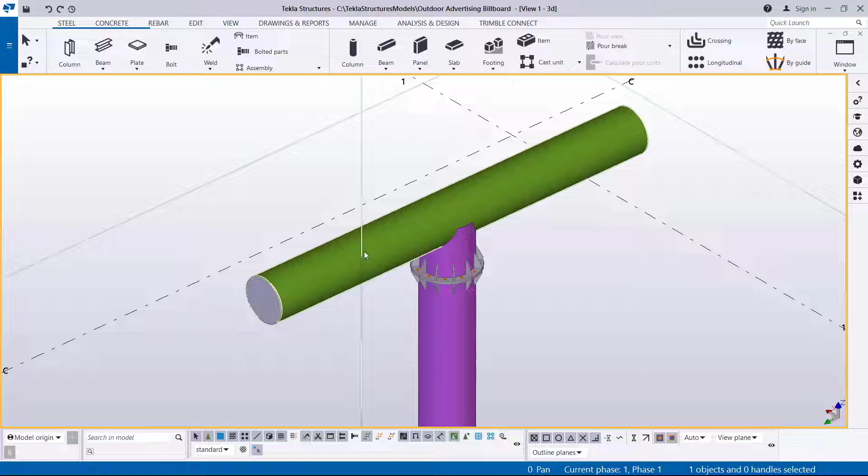Now, on top here, if I press Control R, I'll be able to snap on a particular location, defining my rotation point, and left click and hold my mouse and rotate. That will turn that around like that. So if I zoom closer, you'll be able to see this member.

My target will be to place points along this particular horizontal member. So if I click on it, you'll see this is the datums, and these are the locations that will help me place the points. Once this has been highlighted like that, I'm coming to edit and come to points.

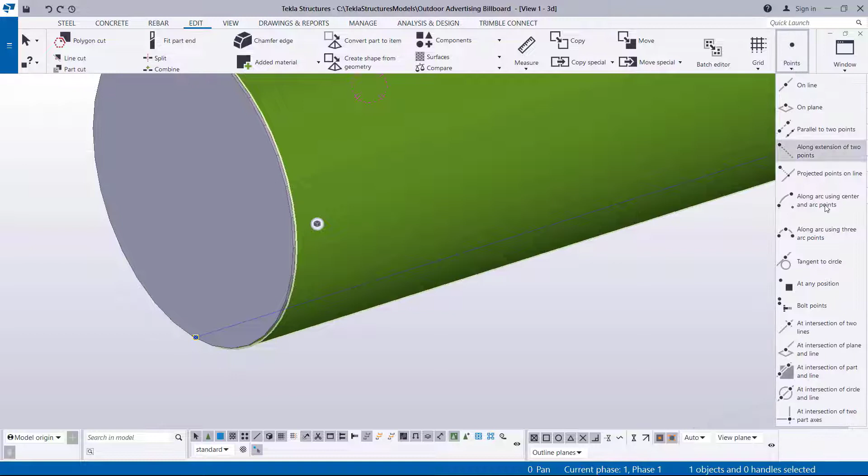I click on the drop down arrow there and pick on at any position. So I'll snap on that point right there and snap on the point right here. I'm going to use the 2 points here.

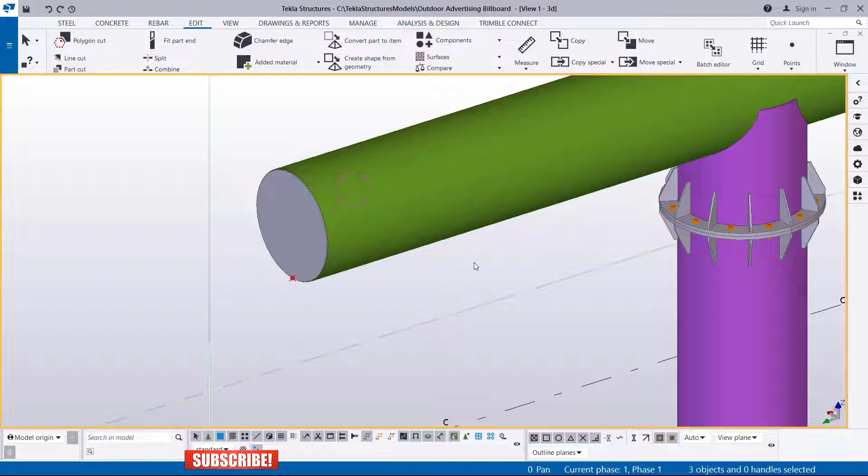I'm going to select that, press Control, and pick on this point I've just created. I want to copy it up. To copy it up, first you have to confirm the thickness or diameter of this particular member. So double click on this member and you'll see this is 650. That 650 is what we'll use to offset this, to copy these members, or to transfer these points up here.

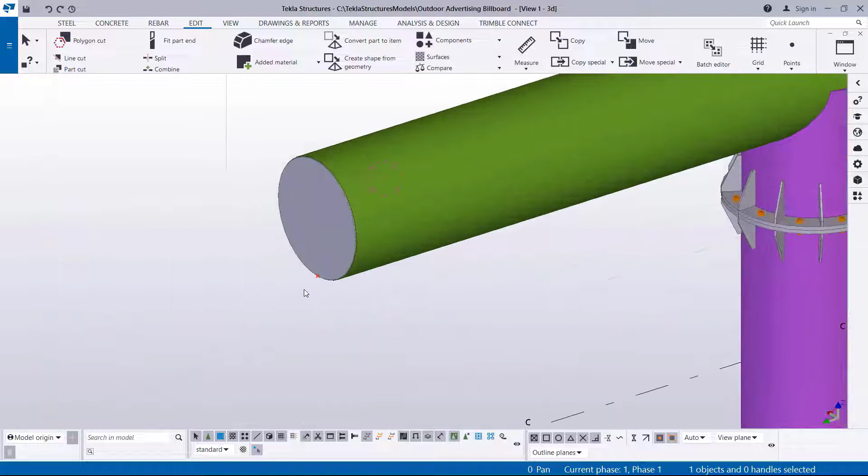I'll right click to come out of that command and start my selection afresh. I'll select on that point, and while pressing Control, select on that point. I'll right click and come to move special, click linear, and on the z-axis type 650 right there, then click move. So the points have moved up here.

This is the location where I wanted the points to be, because the key reason I'm using these 2 points is to guide me on the exact location where I'll be placing these steel members that will be holding the advertising frame that we'll be creating as we move step by step.

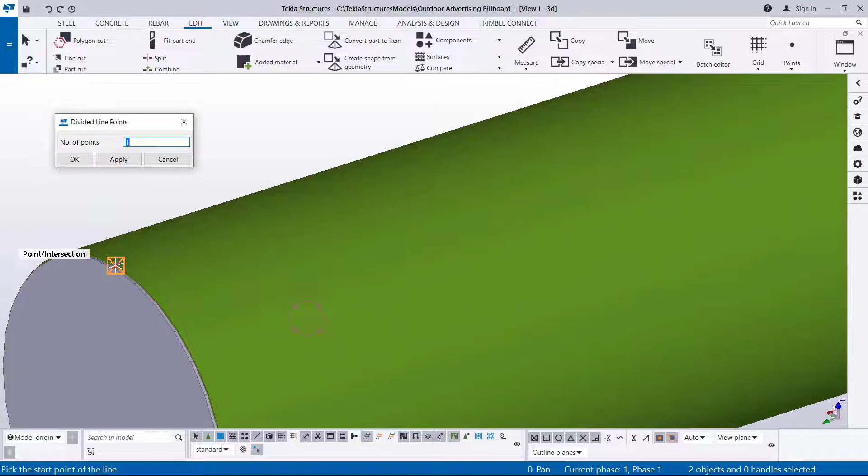I'm going to create the midpoint between these 2 points here. I'll come to edit, come to points, click on the drop down arrow, and pick the on line option. I'll snap on this particular point and move all the way to this far end and snap on that point. If I click that way, I'll be able to create a point in between the two.

Before creating another point, let's check the distance between these 2 points. Before even measuring, from here to here is 3, because the full length of this particular member is 6. So we want to create another point between this point and that point, and this is how we do it.

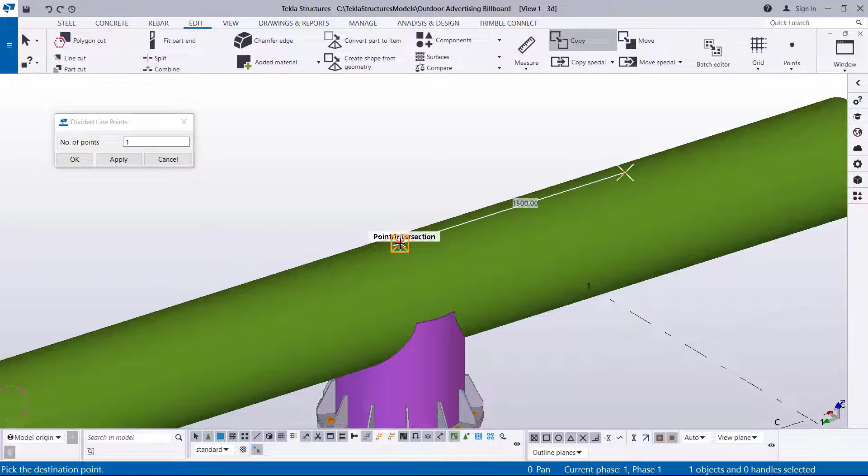We'll zoom close to that point right there and move to this particular point right here, and snap right there. So I've created a point here and a point here. I can transfer this point by selecting it, then right click, come to copy, hold that point from this point, and place it right there to have the 2 in place.

Let's check the distances. I come to measure, and I want to measure from there to here. That is 1500 millimeters. So that's exactly what we wanted to create.

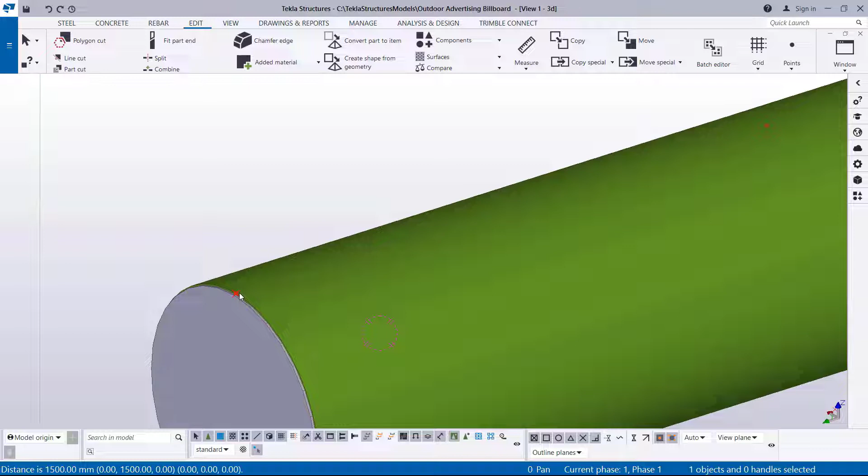Now another thing we want to do: this point is closer to the edge, and that will make it harder to create a member here. We want to give it an offset of 200. We'll eat slightly on this far end by 200, so what will remain will be 1300.

The same thing will apply there. We'll offset that inside by 200 and that side by 200. So let's go and do that. I'll select that point right there and click move, come to move special, and click linear.

On the y-axis, you can see the y-axis is pointing in the opposite direction from where we're moving to. So if you copy any member or point using the XYZ axis, the axis you are copying that component to is the only axis that should have the distance you intend to offset with. The rest should remain 0.

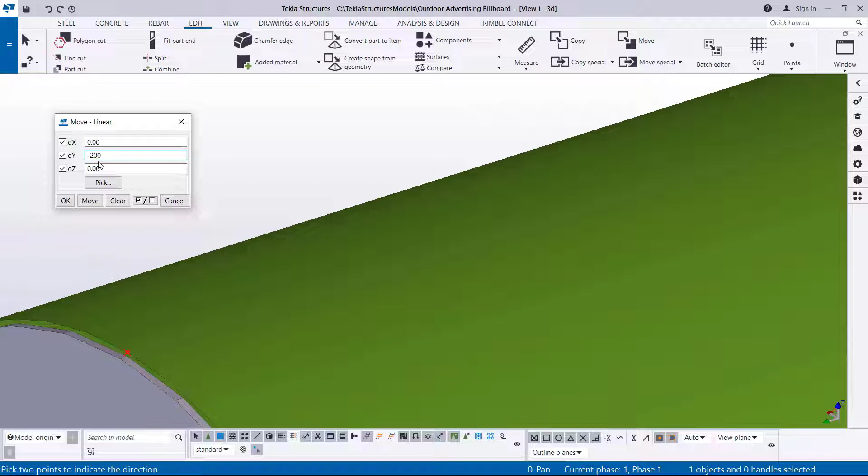So let me change to 0 and come to y-axis. I want to change that to 200 millimeter. Since we are moving in the opposite direction of the y-axis, as you can see here, we'll prefix this dimension with a negative sign. So I'll go ahead and click move. If I click move right there, I'll be able to see that it has moved inside.

So I'm going to do the same thing here. I'll select on that, then right click and come to right click once again. This is appearing because our command is still active, so I'll click interrupt once again, right click, interrupt again, right click again, and we can go ahead and select that point, right click and come to move.

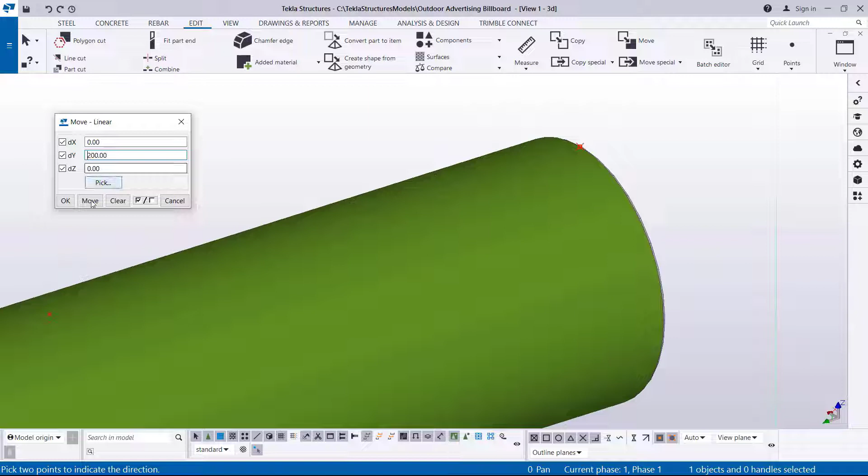And if I click move, since we are moving in the positive direction of the y-axis, I'll get rid of this prefix negative sign. So I'll remain positive, without a negative means positive. So I'll go ahead and click move. So I've shifted that point to that location by 200 millimeter.

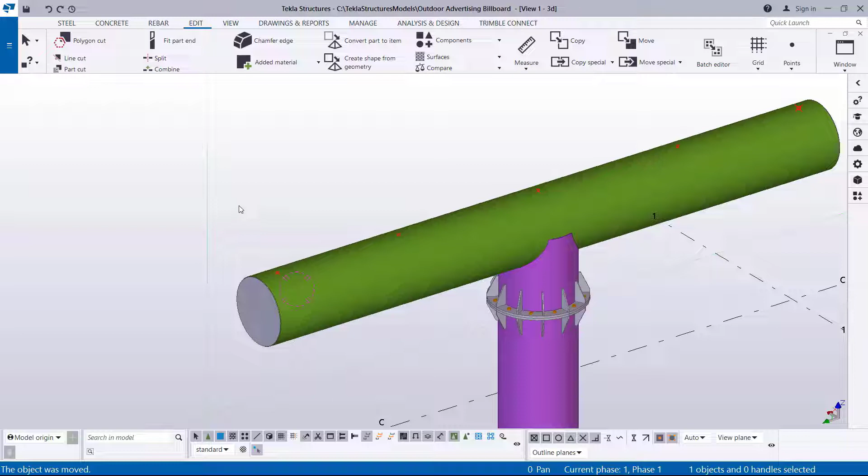So what I'm going to do, I want to create a member here, that way a member here that will be stretching, that will be hanging on the other side 750, and hanging this side by 750, a total length of 1500. So how do we do that?

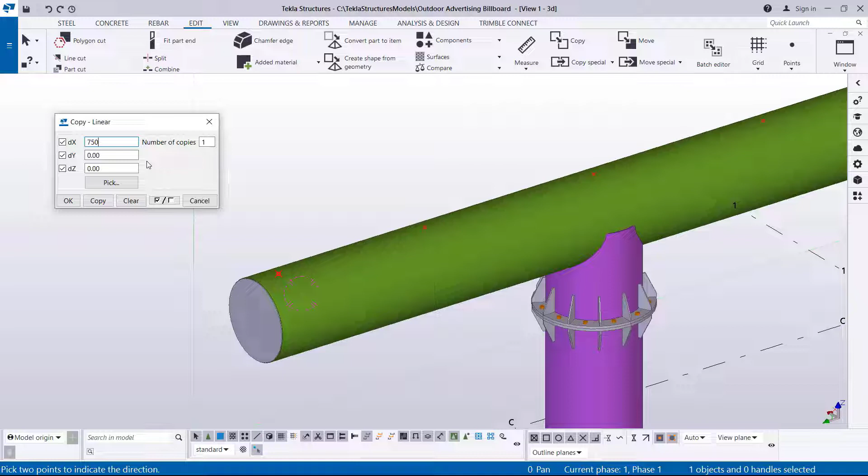I'll use this. Select on that, right click and come to - let me right click and interrupt. I'll select on that point, right click and come to copy special, and I'll pick on linear. So once I've picked on linear, I want to offset or create a point in the direction of the x-axis by 750. Let me just type 750 there because the full length of that steel member will be 1500. So I'll go ahead and click copy. So I've created that member there.

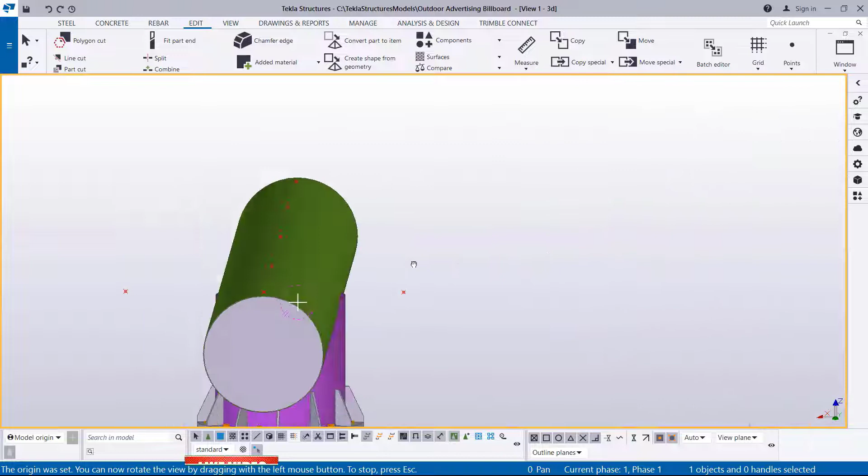So I'll copy this. I'll select from that point right there, right click and come to copy, and I'll hold it from that spot and copy it right there. So you can see, if I press Ctrl R and try to turn that around, you can see I have the 2 points in place.

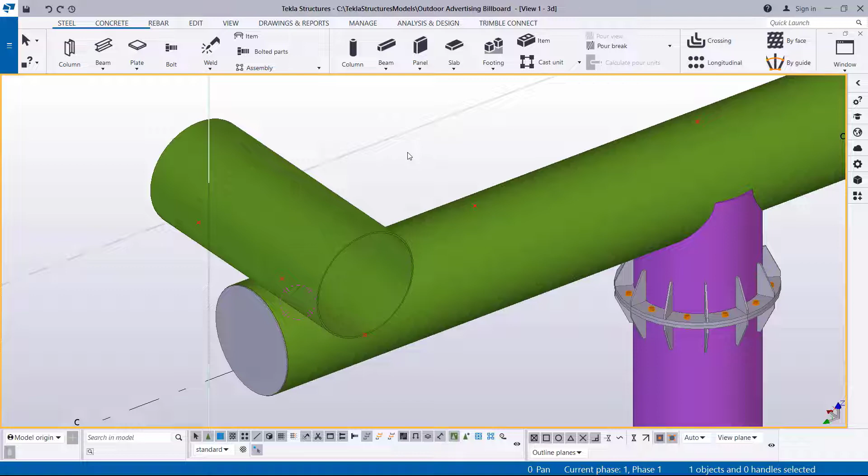So what I'm going to do, I'm going to create a member here. I'm going to come to steel, come to steel beam, and pick on the beam, and I'll snap on that spot and snap on this spot right here. So you can see a circular hollow section - it is appearing because that is our default member creation as it is now.

Now I'll double click on it and modify this, or customize this to a preferred steel size or steel member profile. So this one I'm going to use an I-beam. So I'll come here.

I'll come to steel profiles here, let me just scroll down. I'll come to steel sections here and click on that. So that is a steel Z and all that - I don't need that. I need I-profiles like there.

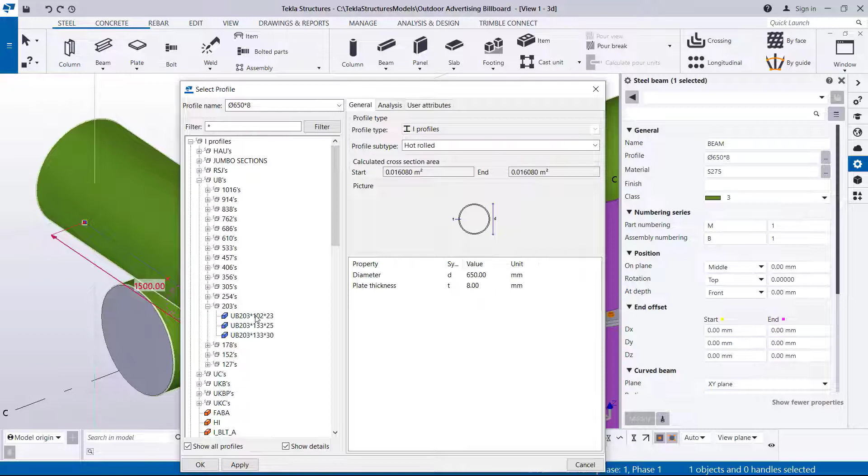So if I come to UBs here, I'll be able to come to 203s. Click on that, and I'll pick the first one, click apply, give it an OK, and give it an OK here. So I have that member in place. So if I press Ctrl R and pick my rotation point, if I turn that, you'll be able to see I have that member in place.

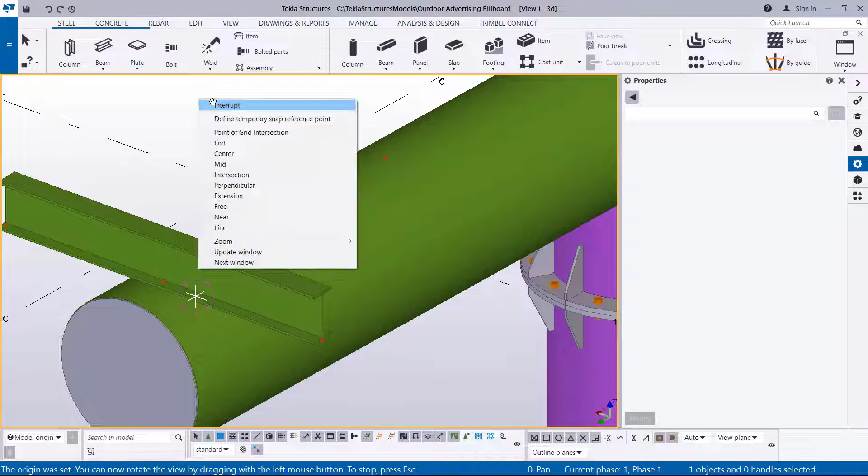So this member will not be sitting right on top of this circular hollow section. It will not be strong enough. So we are going to create another member here, and offset this by 100 upward.

I'll right click and come to special move here, pick on linear, and I'll move it up. Let me change that to 0. So on the z-axis, I'll just type 100 millimeter and offset it up by 100.

So I'll do the same thing with this point, because this will help me create a column there accurately. So if I create the point, now I can use either a column tool or a beam tool. So let me just create the point so that it will make it easy for me to create a member right there.

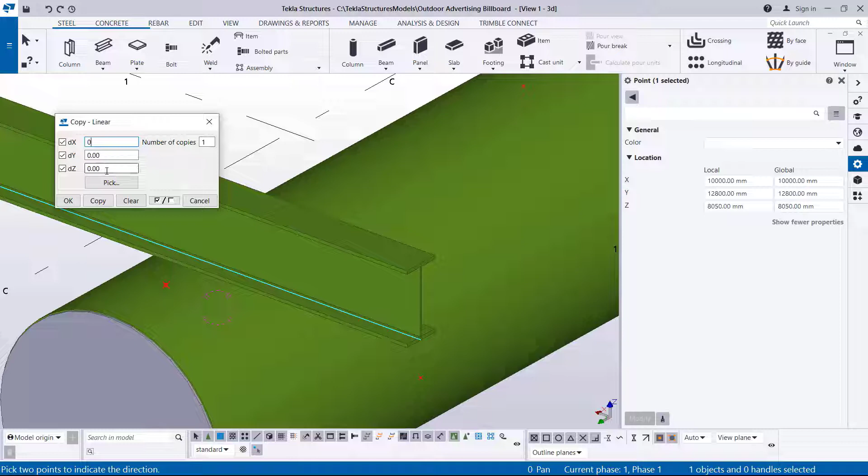So I'll come to special copy and pick on linear, and I want to move this copy - I create a copy of a point upward by 100 millimeter. Let me just type 100 millimeter right there and click OK. So I have 2 points here. These 2 points will help me create a column using a beam tool.

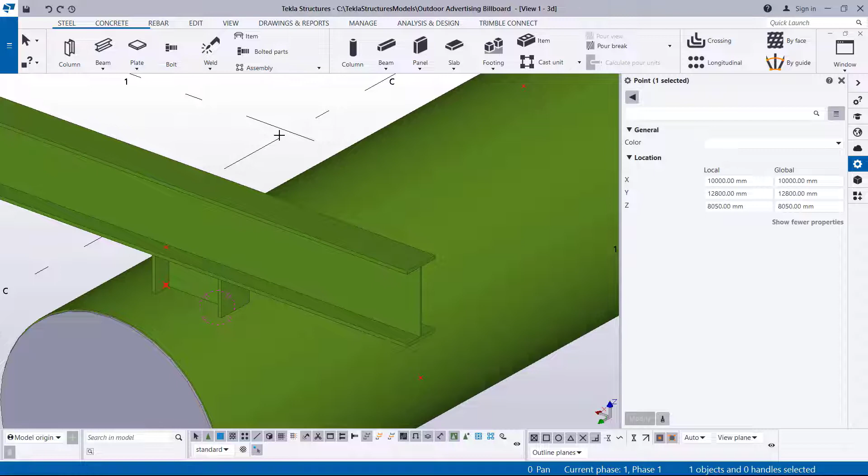So I'll come here and create a tool, create a column using a beam tool right there. You can see I've created a beam here - a column that will be providing seating for this particular beam on top. If you take a look, this beam is not sitting right at the center of this particular circular hollow section.

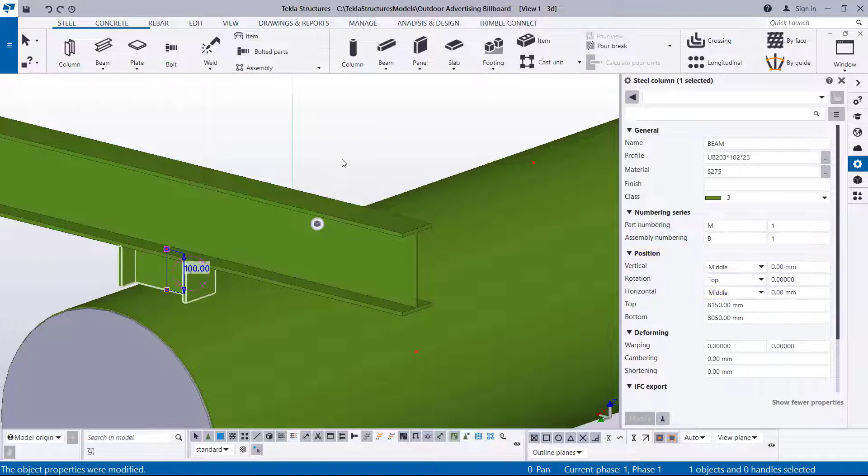So what we have to do is reposition this. I'll double click on that particular member and come to the position options. We have 3 options, each with 3 options against it. Under vertical we have all that, middle, down and up. We'll use the vertical and horizontal to take this to the middle and click OK. So that will shift it to the middle position. If we take a look, you can see that member sitting right in the middle.

Now we want to create a connection - we want to weld it. This will be welded directly onto this circular hollow section member. So we're going to click on applications and components where we get all the macros, and I'll type 'tube', because this connection is for tubes.

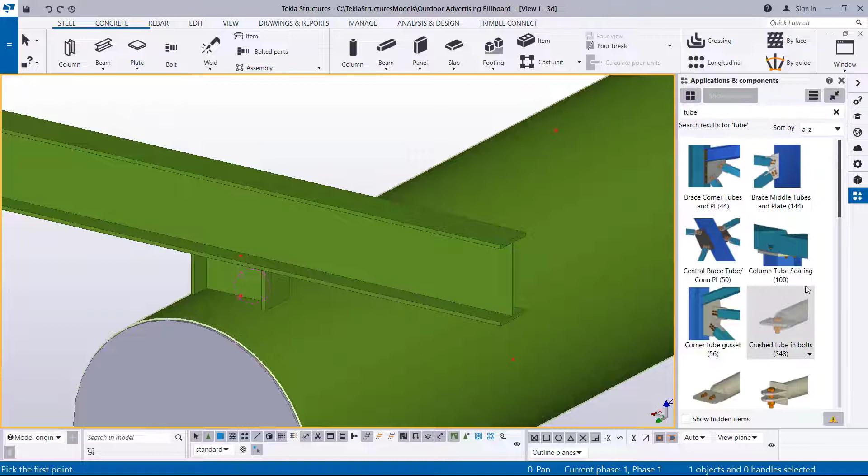I'll click inside and scroll, pick Round tube, and I want to connect this member to this member. The process of selection also matters a lot, because this is where you'll find yourself creating something really weird that will scare you if you're new to tekla structures.

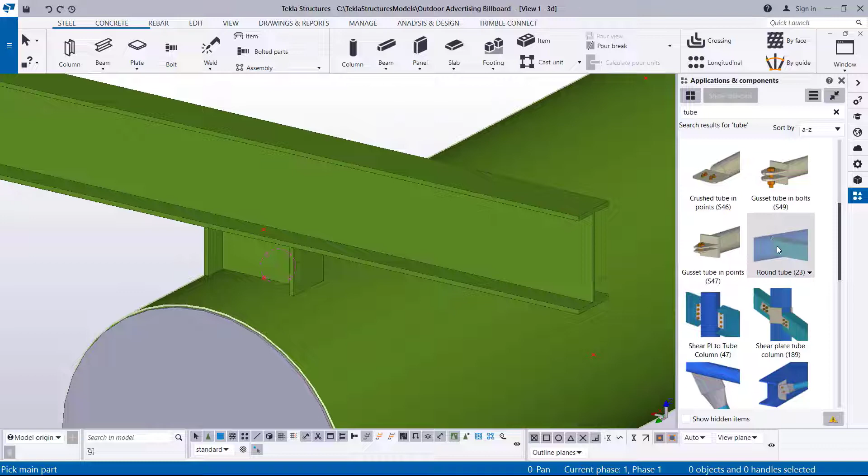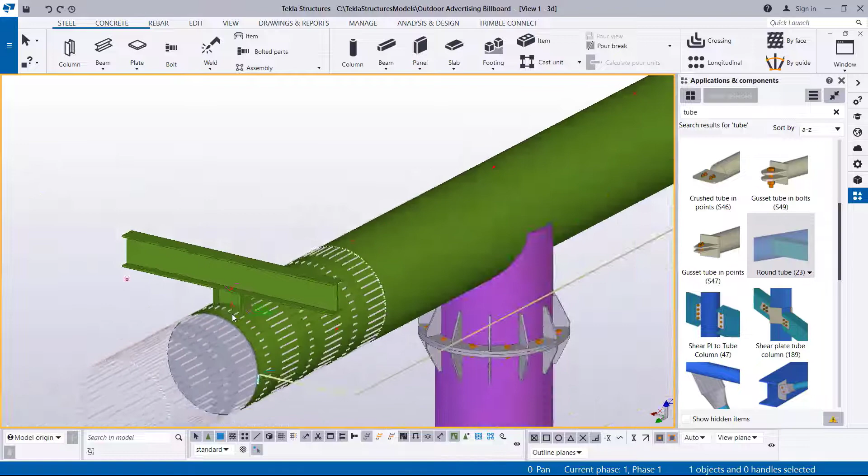So what I'm going to do is undo that, and come back again to this particular macro and invoke that command, and select my main part as the circular hollow section, and my secondary part as that. You can see I've created a connection between these two points. A reason why I don't want to redraw is because I want to retain my points in place, because once I've created a connection here, I'll be able to just copy them as we go. So I've created that, welded this beam to this.

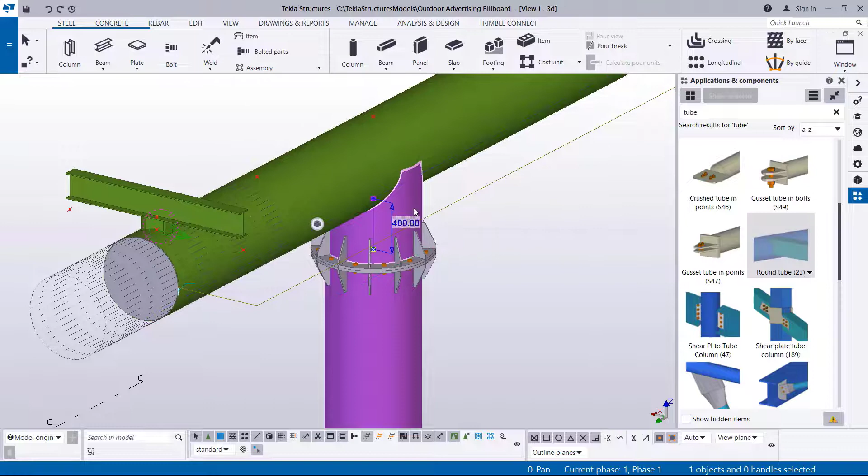So the next thing, I want to create a connection between this member and this member by a bolt - it is a bolt connection. This direction will be done first, this will be erected, then this will be placed on top. This member and this member will be an assembly with this one here, and this will be an assembly on its own when doing the mountings.

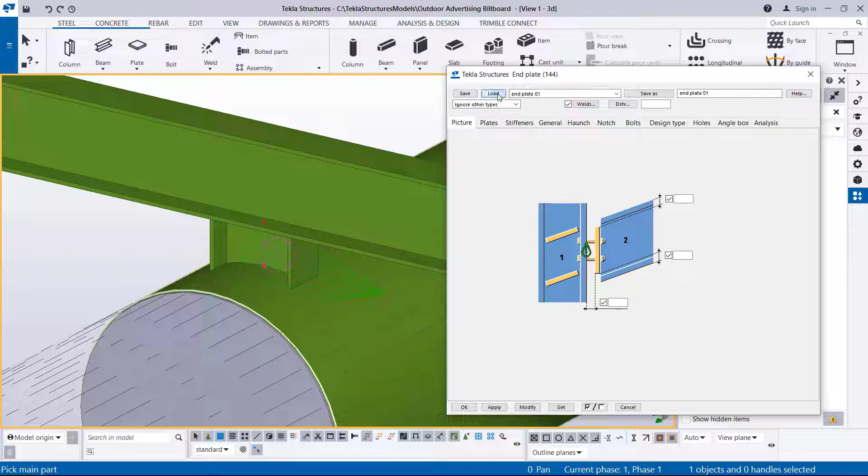Let me create a connection here, and the connection we'll use is 144. I'll invoke that command by double clicking on it, pick my connection, go ahead and click load, and this is what I'm going to use. I'm going to create a connection between this and that - that process is not working out, so I'll connect that to that instead. So I've created a bolt connection between the two.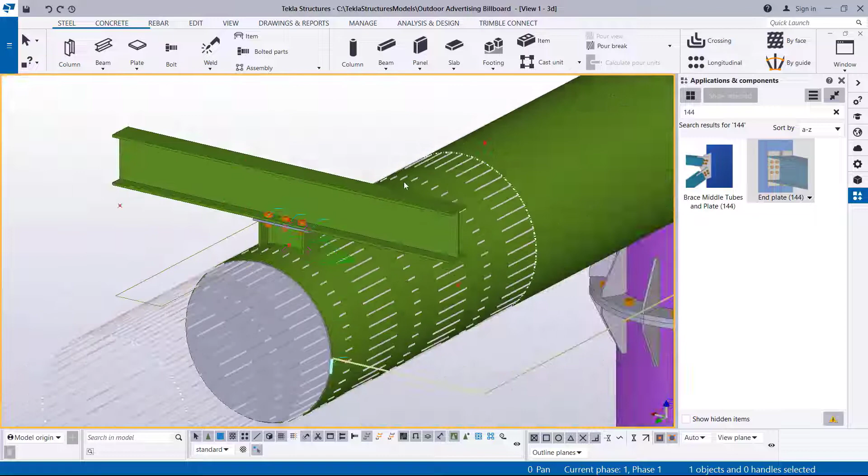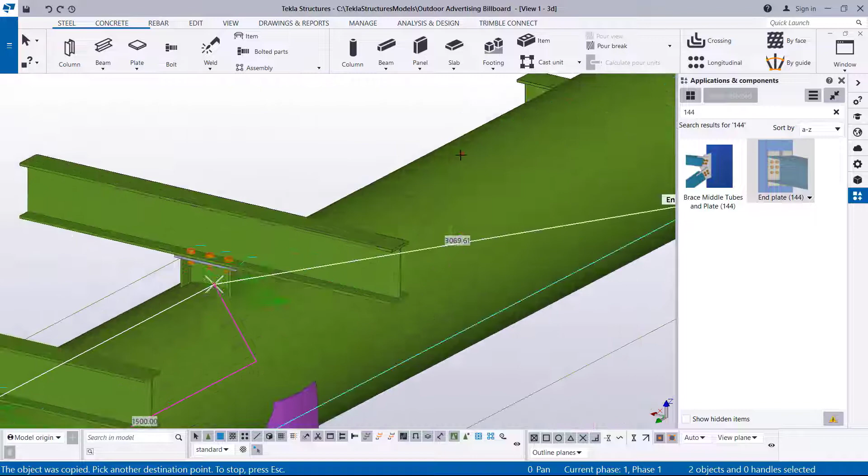So what I'm going to do here is copy this. I'll select this and press Ctrl and select this, right click and come to copy, pick this point, pick the whole assembly from this particular location and place it here. Go ahead and place another one here, another one here, and another one right there. So you have all these members in place.

Now once I have placed this in their exact locations, I have no fear of losing the points. I can go ahead and right click and click redraw to refresh everything. So you can see this is what we have in place - these members are the ones that will be holding our steel canvas frame.

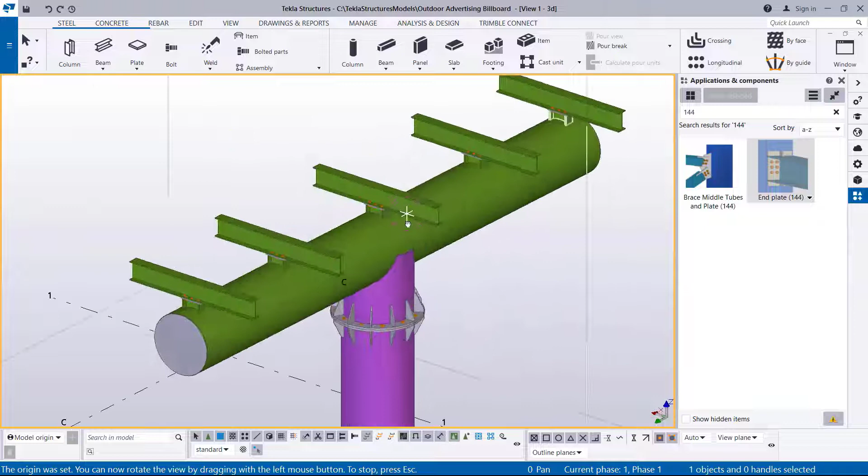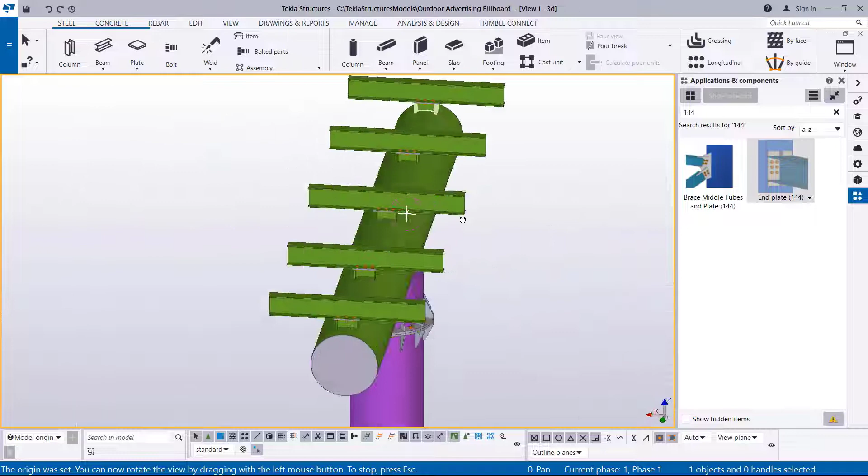I'm pressing my left button after defining my rotation points, and I'll be able to rotate that while holding my left button on my mouse and moving my mouse like that. So this is how it looks. So bye bye, and let's meet then.